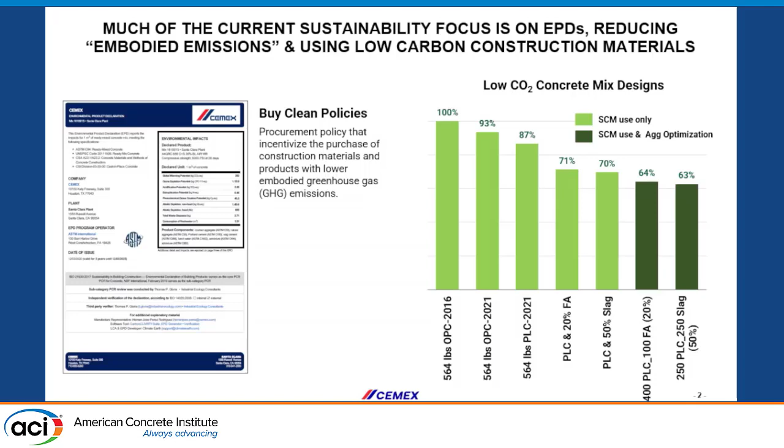But when we look at concrete pavements, and I really want to focus on concrete pavements, but I believe it's probably true for buildings also, we don't design things very well. We don't optimize them. And so they're too thick, they have bad features in them, they get rougher earlier. Because of how we design things, we actually can increase the CO2 in those pavements.

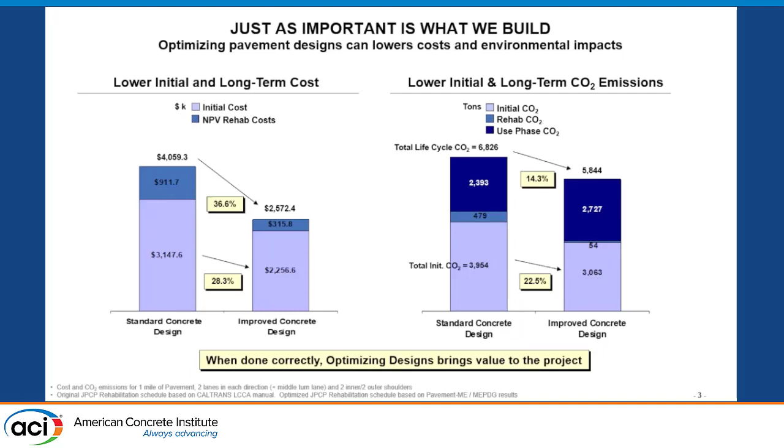So when we optimize them, we can put better features into the system, we can take thickness out of the system, and that will lower the CO2. So we need to start thinking about that. From an industry perspective, we're going to do everything we can, but to owners and designers and agencies, we're also saying, look at what you're building, because what you build is just as important as the materials you're building it out of. So that's what we're going to talk about.

Now, the process to do this is you need to balance performance, environmental impacts, and cost. Because I can usually have maybe two out of those three. I can have something that's low CO2. It's really easy to do. Build a gravel road. Not going to perform very well. It's going to be low cost, but you're going to be doing it all the time, and it's going to actually drive up pavement vehicle interaction and other things.

So you need to balance these, and one of the tools that'll do this, the one we use, and Juan Pablo's got another one he's going to talk about, is the Pavement ME design procedure. The reason why is because it predicts what's going to happen in our pavements.

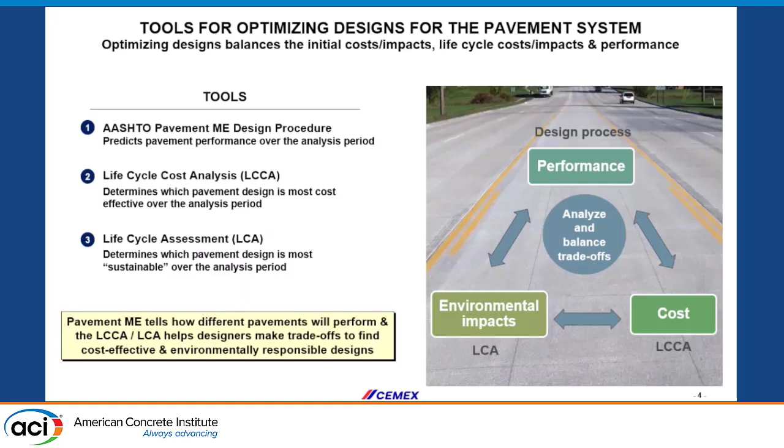The second tool is life cycle cost. Again, I can give you a low CO2 pavement. I can make a pavement last hundreds of years. Most people aren't willing to pay for that. They're barely willing to pay for a pavement that lasts 25 or 30 years. So we need to make sure we can afford it. And the last thing we want to use is life cycle assessment, which is the sustainability aspects of the system, the CO2 associated with it, and trying to balance those out.

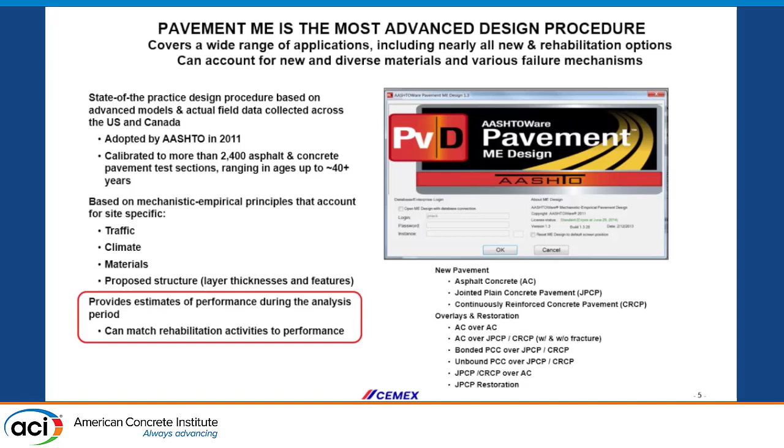The key tool in this, at least the way we approach it, is Pavement ME. This is a design tool developed by AASHTO, officially adopted by AASHTO in 2011, came out in about 2007, 2008, and we've been using it since that time. It looks at all kinds of pavements, not just concrete or asphalt, and how they're doing. But the key thing for us is it gives the performance over the analysis period, so we can change things and see how that performance changes.

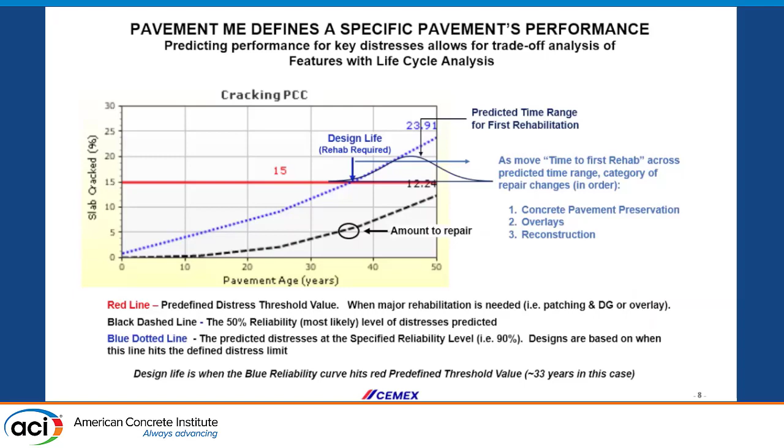And so here's why this is important: now I can start comparing designs. As pavement engineers, one of the things we have to realize is there is no right answer. For any application, I have probably 15 different designs that could work. Some may perform very well for the 50 years. Some may need rehabilitation or patching at year 20. But I can get 15, 16, 20 different designs to give you the service life you want. The question is, what's the best one?

And so what I can do is stick these different pavements into Pavement ME, get performance curves, and start comparing those. And so I can start seeing how these are.

All right, can you see that? Can you see the red dot?

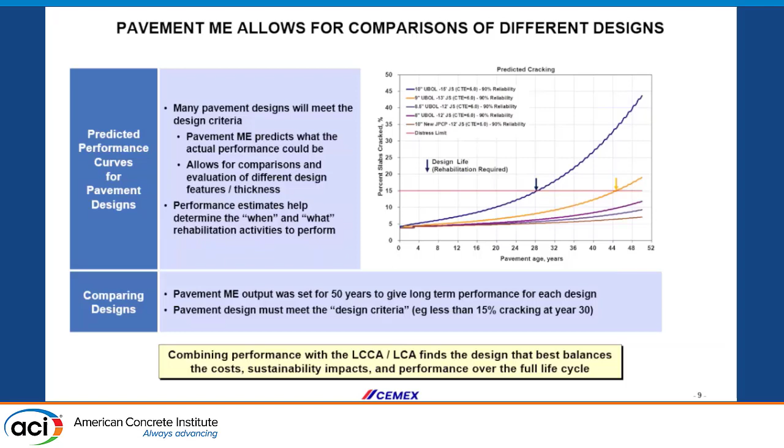A perfect example of this is a concession project we did looking at the pavement roadway. The one everybody was going with was this original design, and they thought it was a better design. It's a thicker pavement, it's got a stabilized base. They designed it to be a 20-year design using the state of Georgia's design procedure, because that's the state it was in.

But when we started looking at the performance and ran these for 50 years, with this original design the cracking starts to go up after about year 20, 25. It starts to accelerate. The reason why is long joint spacing. We have trucks with the front wheel on the front of the slab, the back wheel on the back of the slab, and all of a sudden you have top-down cracking. Environmental stresses start to drive the design more than the loads.

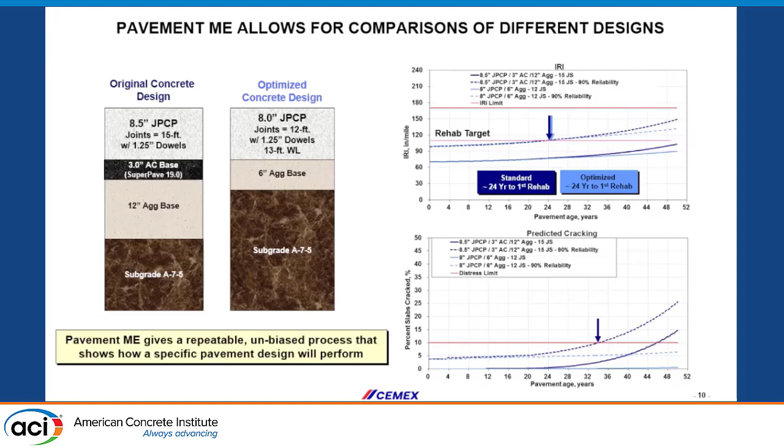So we changed it and decreased our joint spacing. That allowed us to get rid of the base, lower the cost, and widen the lane a little bit. We got about the same performance on IRI and much better performance in cracking, because we knew what we needed to address. We could say, hey, my problem is top-down cracking, I need to change how that happens. And so that's what's important about it.

Concrete pavement is what I like to call a creature of features. It depends on what you build in this roadway and how you build it. These are some of the things that are really important to designs. My favorite, and Juan Pablo is going to go a little bit further on it, is short joint spacing. Everybody wants to build 15-foot joint spacing. It's one of my goals in life to get that changed.

I like 13-foot joint spacing. Why? Because I like 13-foot wide outside lanes. Why? Because I shift the load a little bit into the middle and get an interior loading. And now with 13 by 13, I'm square. Concrete likes to be square. And it's a number you can tell people on the construction side: everything needs to be 13. They've got their number, they're good with this. But some of the other things, dowels.

Again, I still see a lot of states using 1-inch dowels. I see it a lot in private work. We need to be at least 1 1/4 inch, and a lot of times 1 1/2 inch. Another thing I like, especially on thinner pavements, is plate dowels. What they do is spread the load out over the concrete, so you don't crush the concrete.

They perform much better. Tied shoulders, optimized aggregate gradations. Pulling cement out of a mix can really help sustainability. It can help strength. It can help workability. If you do it right, there's ways to do it. You can't just pull out cement and get it. You have to know what you're doing and figure it out, but it's not that difficult, and we need to address it, especially if we're dealing with sustainability.

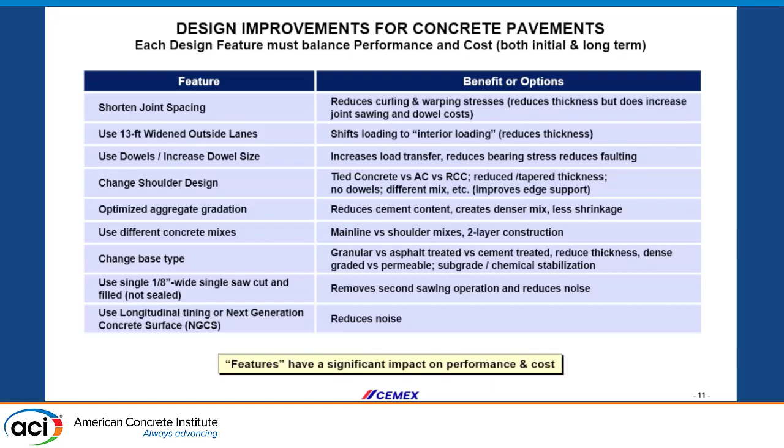But here's one important thing. This is how we actually start looking at and figuring out what the optimization is. Currently, designs are done in what I call a static mode. I have a pavement, I need to design it. I go through some type of design process, figure out if it's adequate performance, yes or no. Once I figure it out, I go and apply a life cycle bill of activities.

I picked on Georgia already once. The state of Georgia says, I'm going to do this at year 20, this at year 30, this at year 40, and it's the same stuff for every pavement, whether it's an 8-inch pavement or 12-inch pavement. Interstates, low volume road, they apply the same life cycle bill of activities. That's not very realistic. And then they come up with their LCCA, or their life cycle cost analysis.

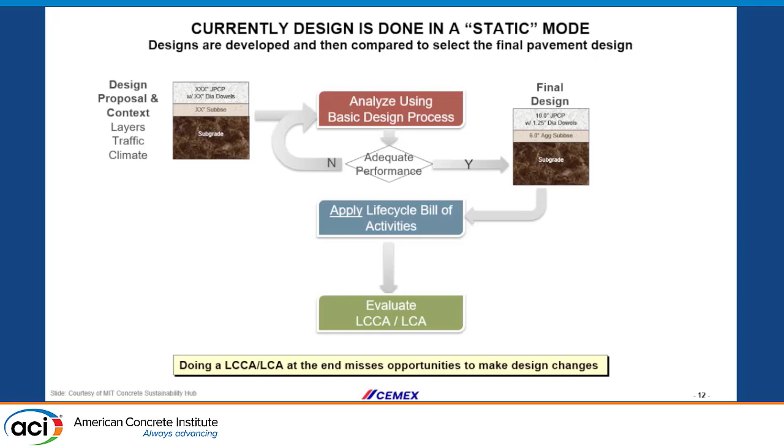What we need to do is change our process. We go through with these ME design principles, we look at what's actually happening in the pavement, and from that performance we figure, hey, at year 32, that's when I'm going to need to do something. What am I going to do? I'm going to do patching based on that performance graph, and then I evaluate it in the life cycle cost analysis or life cycle assessment and say, is this what I want? Yes or no. And if it's not, I reiterate it.

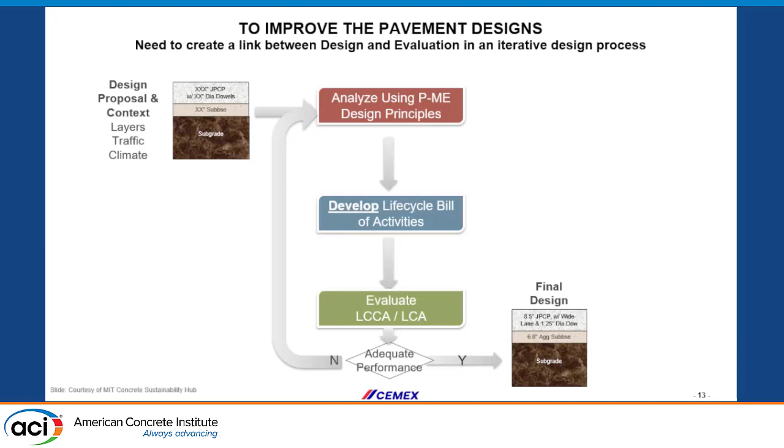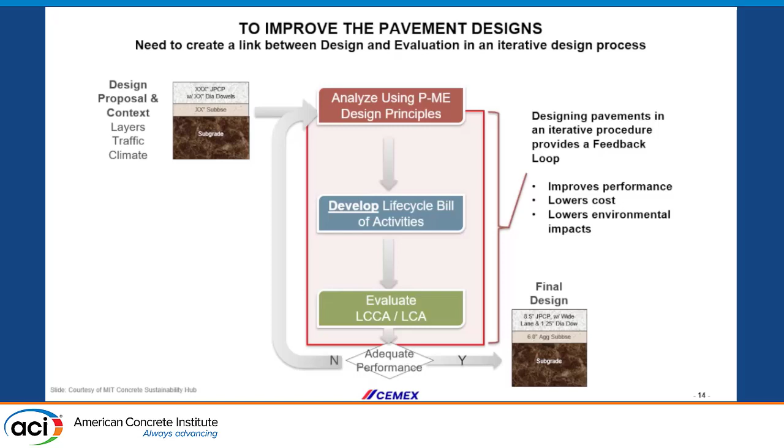And as I go through this feedback loop, all of a sudden I can start finding places to save. Save money, save CO2, improve performance by putting all these things together. And it's that iterative process that actually allows us to do some good things. So here's an example of what can be done.

This was actually a project we looked at with the MIT Concrete Sustainability Hub. It was a Caltrans project. This was not sponsored by Caltrans. The student working on it at the time, his dad worked for Caltrans. This was his dad's project. He said, Dad, I need a project, and he gave him the work he did. So we optimized the project using this.

So here was the original Caltrans design, 9.6 inches, lean concrete base, 7.2 aggregate subbase. These are just standard designs. This is what's going to be in every Caltrans design out there. This is supposed to be a 20-year design. Here's all the patching that goes with it.

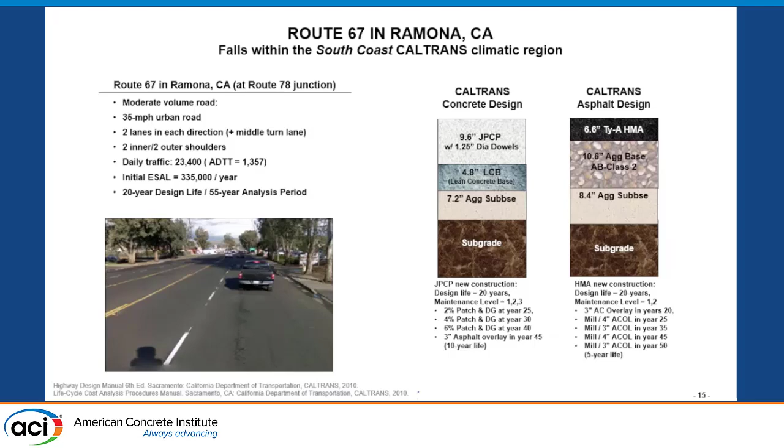If you look at the life cycle cost analysis and the life cycle assessment, this project went asphalt. It makes a lot of sense. 2.2 million versus 3.1 million, 3.2 million. Even over the life cycle, concrete was much higher. Caltrans, from this perspective, made a good design decision.

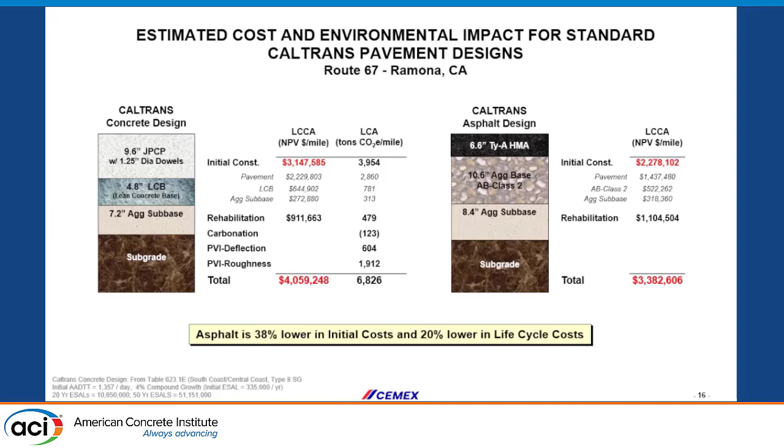Here's what the CO2 was, 3.9 thousand tons of CO2. You can see what was in it, 6,800 over the life of the project. So that's what the CO2 was. But when we started analyzing and looking at this, we went, wow, this pavement is over-designed.

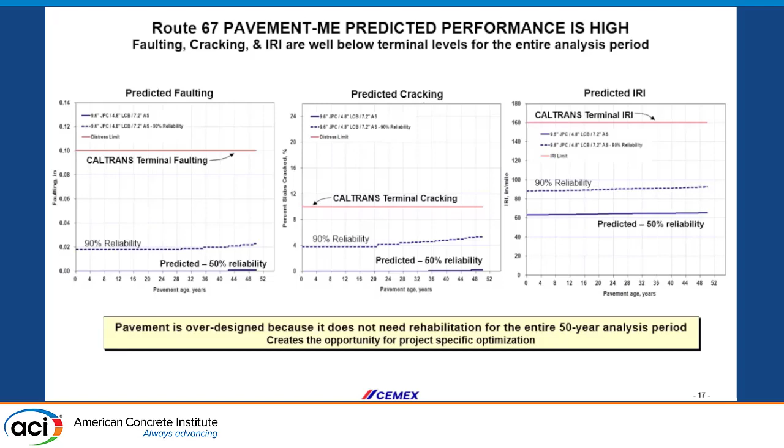Now, that's not bad if you're willing to pay for it. But if you're not willing to pay for it, and they obviously weren't willing to pay for it, it's not a good design. And so there's better things to do with it. So we said, what can we do? So we started looking at ways to optimize the designs. We lowered thickness. We removed the lean concrete base.

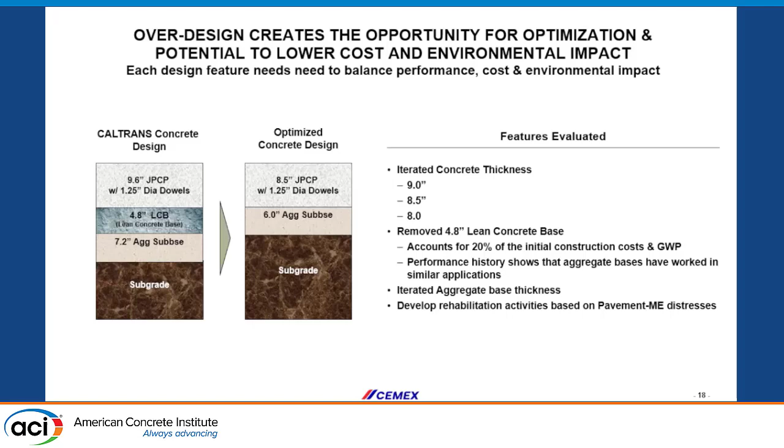This was a 35-mile-an-hour suburban road, mainly cars. It didn't need a lean concrete base underneath it. It was just too much for it. And it accounted for 20% of the global warming potential. So we went through these, looked at all the different performances, kind of lined up the curves here where they are. Here was the original one.

It's purple. Started trying different bases, lean concrete, different thicknesses. In fact, the 8 inches over 6-inch aggregate base easily met the 20-year design. For the optimization, we looked at it and said, a better one is this 8.5. It's going to last a lot longer.

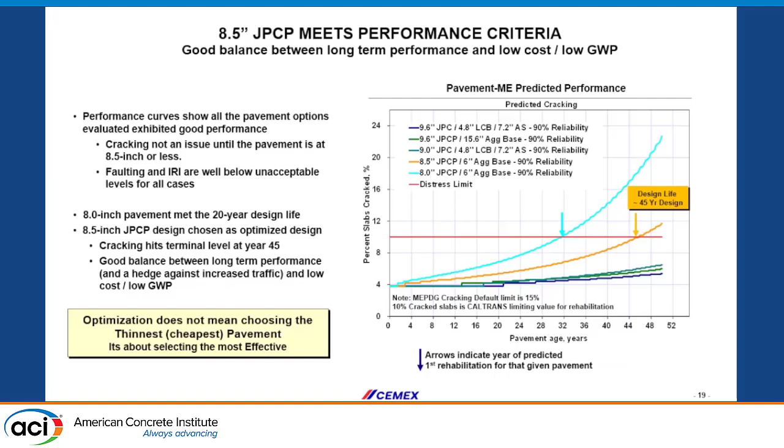You're going to pay just a little bit more in material prices, because that's all you're paying for at this point. It's just a little bit of material. It's the same labor and everything else. And you're going to get an extra 15, 16, 17 years out of this pavement. That was the one we chose.

And when you look at it, what you find out is we lowered our initial CO2 by quite a bit. We lowered our initial costs, and I want to go back to that. 2.278, that was what the asphalt was. 2.256. All of a sudden, concrete can compete.

Now, if you want to really compete, you could put them head-to-head, alternate design, alternate bids, and you could compete them against each other. But we were able to lower our CO2. We were able to lower our cost of this project. We optimized the entire life cycle. Now you also start asking people for EPDs. And you say, hey, I want to know what CO2 can you give me in my concrete mix.

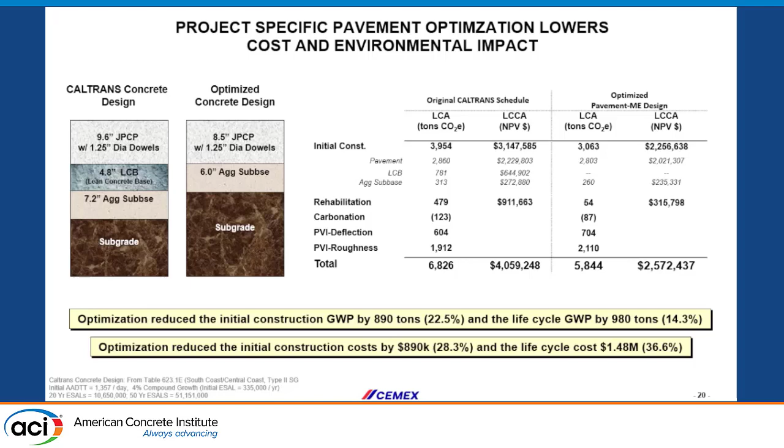And once I have the right design, I'm starting off with 3,000 tons of CO2. Now I'm asking them to give me better concrete, optimize my mix, use my EPDs, use my SCMs, use my LC3 concrete that I just heard about. All of a sudden I can drive this even lower. Then you put that against everybody else out in their market. That's how you do it. But it takes that initial design to begin with. That's where you need to start.

So, what I want to talk about is, yes, the focus on sustainability and EPDs and low carbon concrete, it's the right thing to do. My company's committed to net zero concrete by 2050. The industry is committed to net zero concrete by 2050. We are looking at it. So much of it is happening at this conference. Need to learn about it.

However, we also need to drive home the message. It's not just what you build out of, but what you build. And we need to get agencies and owners and everybody else online with it. I've heard, hey, Amazon wants to do all this stuff with us. Amazon's great. They're going to say, hey, we want to lower concrete. The problem is they build 5, 10 buildings, and that's not enough volume for us to change a lot of the stuff we want to do as an industry.

We need to get Caltrans, Georgia DOT, all those people involved in it, the cities, the counties, everybody looking at this. Once we do that, we can recognize that we have to optimize that design. We don't want to go too low. Under designing is just as bad as over designing.

If you look on the asphalt side, probably the thing that's happened more on their side from a pavement perspective is a lot of things are under designed. And they can tweak their designs just a little bit, not at a whole bunch of cost, but they're going to get a much better performance, life cycle cost, and lower CO2 also.